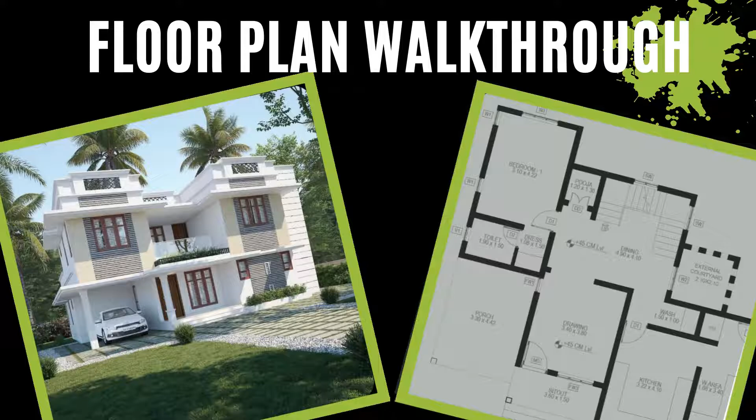In today's video, we'll have a look at the floor plan walkthrough of a 3-bedroom house. This house has 2 floors and a total area of 2,138 square feet or 198 square meters. This is an east-facing house and was done in flat roof. As mentioned earlier, this has a total area of 2,138 square feet, of which 1,232 square feet is in the ground floor and 906 square feet is in the first floor. This house was constructed 45 centimeters above the ground level.

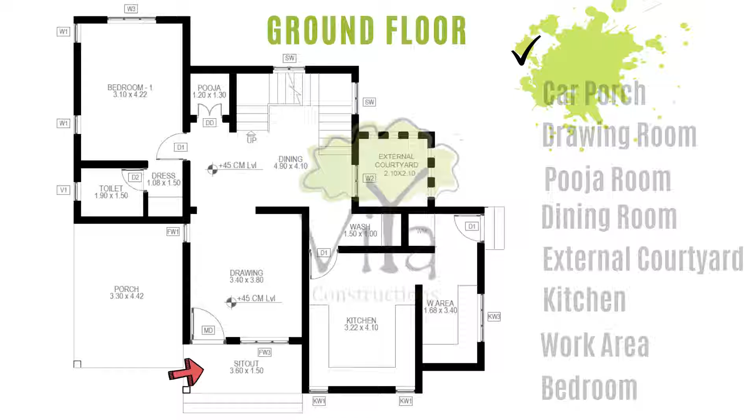Come, let's have a look at the plan in detail. We'll have a plan walkthrough at first and then we'll have a look at the completed house. As soon as you enter through the gate, you see a 3.6 meter by 1.5 meter sit-out. Adjacent to the sit-out, there is a car porch of size 3.3 meters by 4.42 meters. Pillars are provided at the 2 corners of the car porch. From the sit-out, you enter the house through the main door. The main door is made of teak wood.

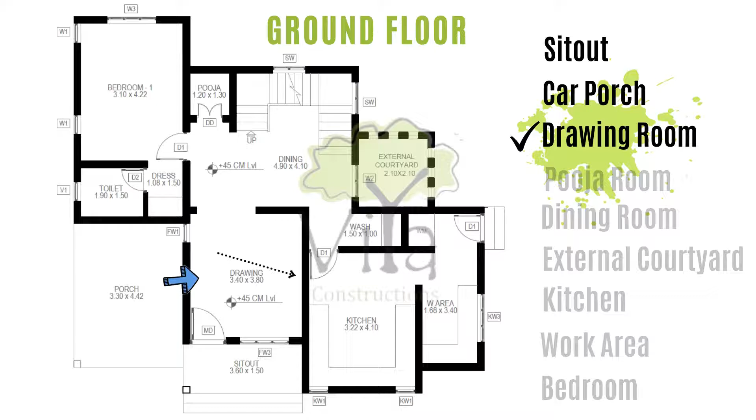The drawing room is rectangular in shape with dimensions 3.4 by 3.8 meters. The area of the drawing room is 139 square feet. There are 2 French windows in the drawing room. One window has 3 panes that open into the sit-out and the other is a single pane window which opens into the car porch. You can place the sofa here and a TV unit on the opposite wall.

There is a puja room which has a direct visibility from the entrance. The puja has been designed as a separate room with designer double doors. There is a dining area with a separate wash unit. The highlight of this dining area is an external courtyard which measures 2.1 meters by 2.1 meters. In this plan, the courtyard has been constructed inside the house with windows, but you can also treat this as an external sit-out with a door from the dining area.

Adjacent to the dining area is the kitchen. The area of the kitchen in this house is 142 square feet with dimensions as shown. It has a U-shaped worktop. There is provision to place the hob, the sink and the refrigerator in such a way to attain the perfect working triangle without being obstructed by the traffic through the kitchen. There are 2 windows in the kitchen.

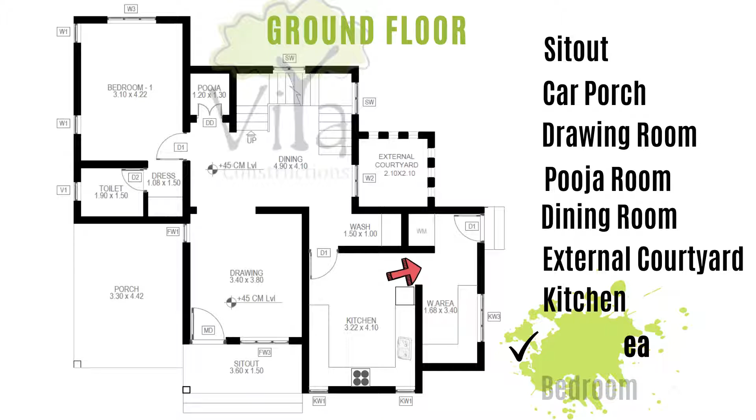Next to the kitchen is a work area of dimensions 1.68 by 3.4 meters. There is an L-shaped worktop and a large 3-pane window in the work area. There is also separate provision for a washing machine in the work area. The exit door from the work area leads you to the exterior of the house.

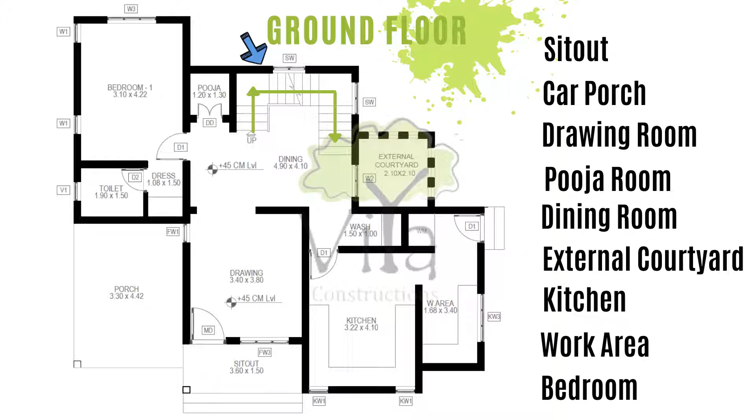There is 1 bedroom in the ground floor. There are 3 windows in the bedroom providing excellent ventilation and lighting. There is 1 large wall where the cupboards can be installed. The size of the bedroom is 141 square feet. There is a double L-shaped staircase that takes you from the dining area to the first floor. There is provision for storage under this staircase.

You ascend the staircase and reach a large upper living area. There are 2 large windows on opposite sides of the upper living area. There are also 2 large open terraces. This makes this upper living area extremely well lit and well ventilated. There are 2 bedrooms on the first floor.

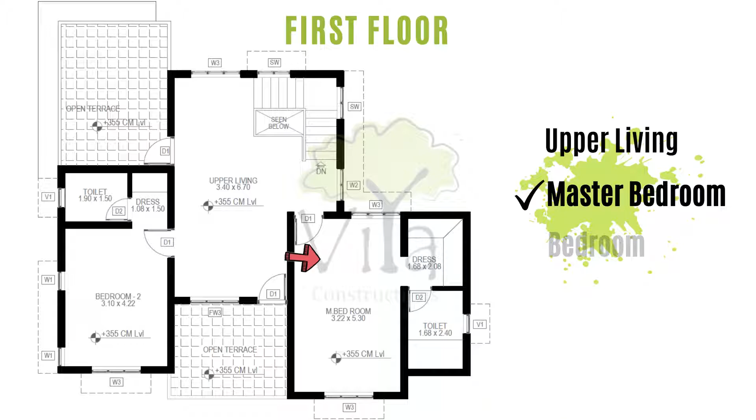The master bed has a size of 184 square feet. There are 2 windows on the opposite sides of the room providing excellent light and ventilation. There is also a separate walk-in closet area and toilet attached. In case you do not require the walk-in closet, you can remove that and convert the entire space into a large bathroom. The second bedroom on the first floor is of the same area as that of the ground floor, that is 141 square feet. Here again there is a dressing area and a toilet. Now let's have a look at what the plan looks like when the house is constructed.